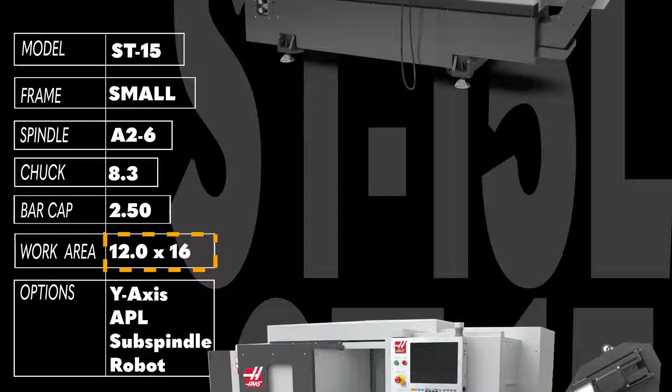Or you can boost up the power in the same compact frame with the A2-6 spindle and 8.3-inch chuck in the ST15. Inside, you'll find the same roomy 12 by 16-inch work envelope in the standard machine, or 32.5 inches in the long bed, but the ST15 has a 2.5-inch bar capacity.

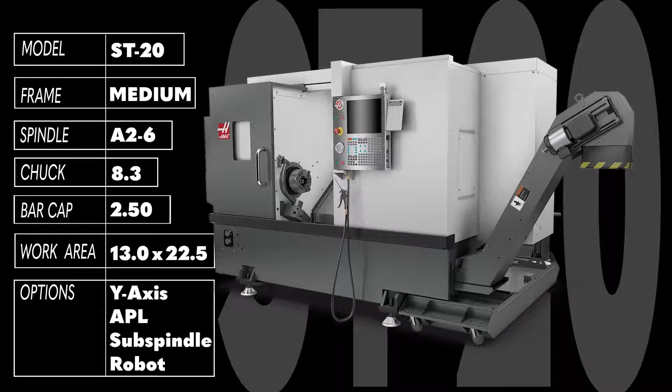You'll find that same versatile, powerful A2-6 spindle in our mid-size machines. The ST20 is a production standard worldwide with its 8.3-inch chuck and 2.5-inch bar capacity. Open the door and you'll find a larger 13 by 22.5-inch work envelope in the standard machine, or you can roll that Z-axis all the way out to 42.5 inches in the long bed version.

Kick your material handling capacity up a notch with the ST25. You'll find the comfortable 13 by 22.5-inch or 13 by 42.5-inch work envelopes in the standard and long bed machines, but at the business end, you'll find a big 10-inch chuck and 3-inch bar capacity.

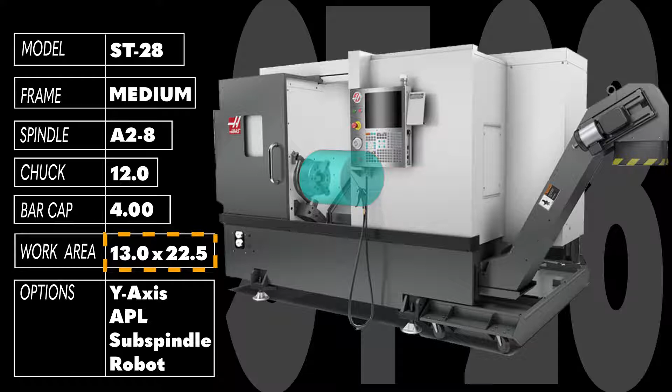Throw a huge A2-8 spindle and a 12-inch chuck into the ST20, and 4 inches of bar capacity, and you get even more utility from the same compact medium frame footprint. That's the ST28, extra large capacity in a 13 by 22.5-inch workspace or in the 13 by 42.5-inch long bed.

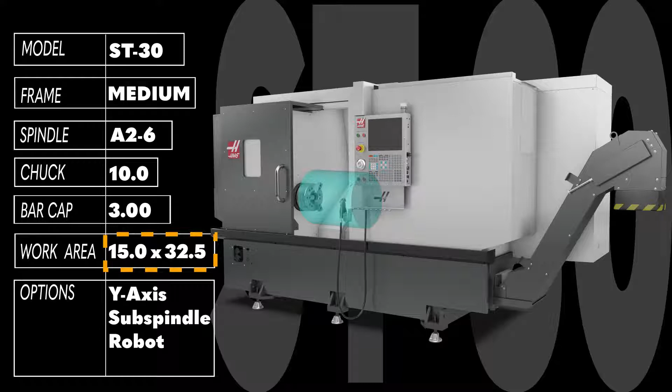The work envelope expands in the ST30. The powerful A2-6 spindle, coupled to a 10-inch chuck, gives you 3-inch bar capacity in a spacious 15 by 32.5-inch work envelope in the standard machine, or a huge 15 by 62.5 inches in the long bed.

Add a second spindle to the roomy work envelope and powerful A2-6 spindle of the ST30, and you get our versatile DS30. With a 10-inch chuck on the main spindle and an 8.3-inch chuck on the secondary spindle, while still boasting a 3-inch bar capacity and a 12-station BMT65 turret, the DS30 brings the ability to finish both sides of the same part in just one setup.

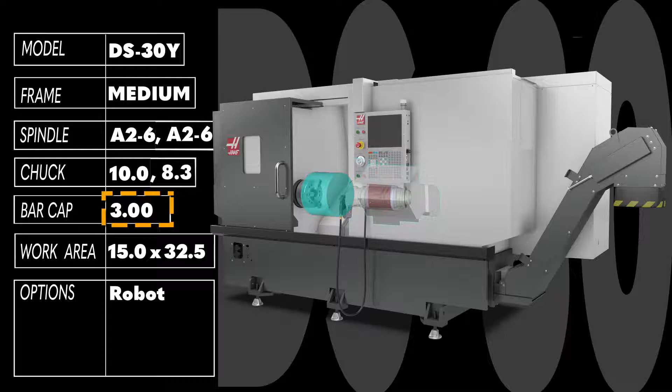The massive A2-8 12-inch chuck and 4-inch bar capacity trifecta meets a truly roomy workspace in the ST35, with its 15 by 32.5-inch envelope, and the ST35L long bed, with a 15 by 62.5-inch front office.

Large part capability comes into its own in the ST40 series. The cavernous 25.5-inch by 44-inch work envelope of the ST40 grows out to 25.5 by 80 inches in the ST40L long bed. That's over 6 feet of workspace. You'll find the hefty A2-8 spindle turning a 15-inch chuck and a chunky 4-inch bar capacity.

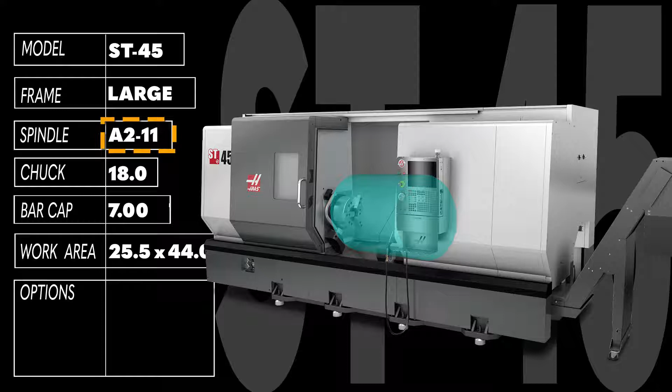Even more bar capacity, a full 7 inches of it, and a hefty 18-inch chuck and beefy A2-11 spindle makes large part production dreams come true in the ST45. Featuring the same enormous work envelopes of the ST40 and 40L, when you have to turn big parts, the ST45 and 45L are the machines to turn to.

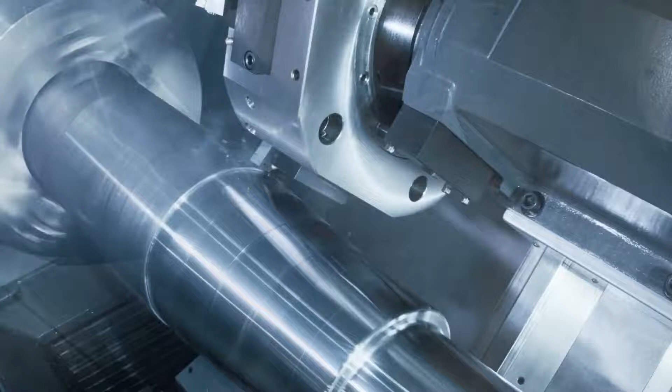Unless your parts are really big. Now you need the amazing torque of the huge A2-15 Plus spindle in the ST50. With the same 25.5 by 80-inch work envelope of the ST45, the ST50 boasts an 8.5-inch bar capacity.

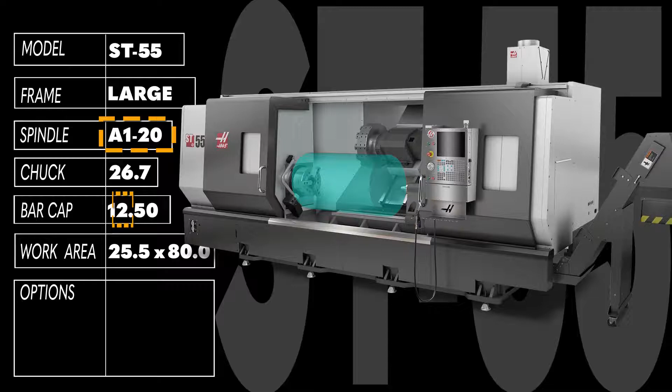And the ST55 steps up to the enormous A1-20 spindle, offering 12.5 inches, handling bar and pipe stock up to a foot in diameter.

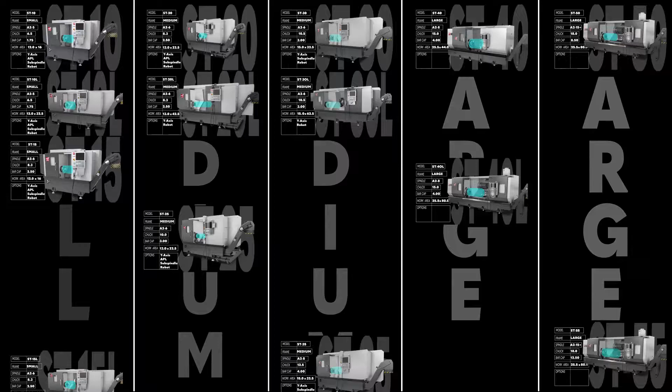No matter what part you're making, chances are there's a Haas ST Series turning center that can help you make it. Check out all the specifications and details